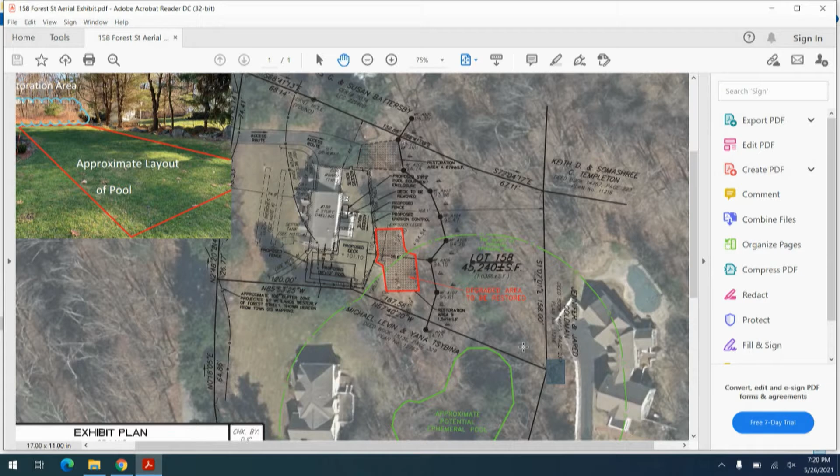I need a motion — motion on the waiver, or motion to close? Motion on the waiver should come first. I move that we deny the waiver request for 158 Forest Street, 242-1800. Second. All those in favor say aye. Aye. Opposed? That's unanimous.

Then we need a motion to deny, basically because we have no waiver, on 242-1800. The motion's got to move to close and issue in 21 days, I think, right? Yeah, that's the correct motion. So moved. Second. All those in favor say aye. Aye. Opposed? That's unanimous. Thank you.

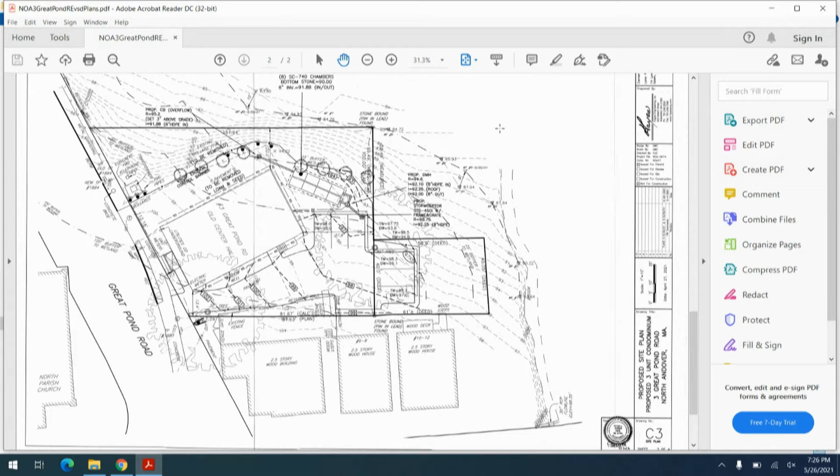It's pretty common to put an infiltration bank beneath a parking area. Yeah, I have it at my place. It's not like we're asking something unusual, and they have to excavate it anyway. So that was my only issue. But Sean, I'm sorry. No problem.

So there are 6 parking spaces that go within the 50? Well, there's 6 parking spaces, corners of which are in the 50. Can you point them out? I'm just going to blow it up a little bit. Sure, all right, so here's the 50-foot line along here, and here's the corner of the parking. And then here's the stormwater chamber, here's the 25, and there's the 50. Gotcha.

Is there an issue with the brook that needs to be evaluated or has been evaluated? We just wanted to make sure whether it was perennial or intermittent, and stream stats show that it's intermittent. So we wanted to make sure we weren't in riverfront.

I don't have any other questions at this point. Thanks. Okay. Right now? Ready?

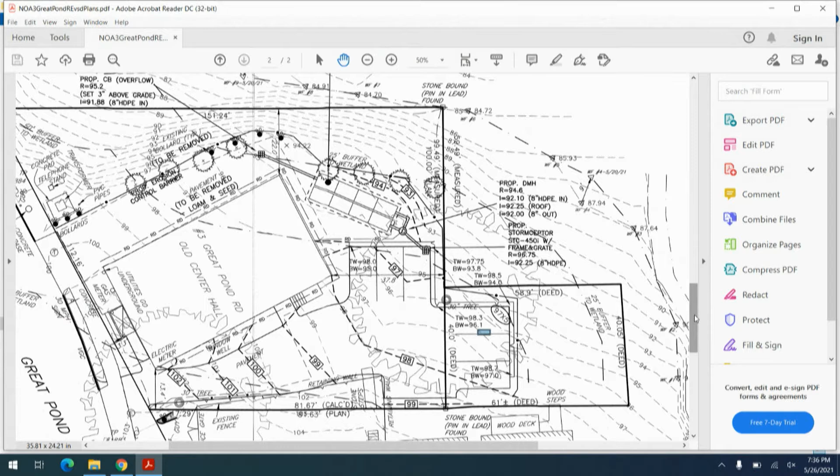I do have an additional question. It's not so much for Libby, but to bring back to the engineers: on the infiltrating system as it's currently proposed, there is a catch basin overflow, basically a relief drain, that when the infiltrator can't take the capacity to meet the runoff, it does result in a point source discharge coming out of that overflow. Test pits are going to help determine to what degree that's necessary and what the impacts might be, but I think we'd be concerned about creation of a point source discharge within the 50.

Did you catch that, Libby? I did. Okay, all right. So there's enough information to go forward for the next time, right?

Yeah. I want to go through comments from the abutter at 10 Johnson Street, Michael and Louise Donovan. I shared that with you guys, but let me go through their questions. It's kind of long, so I'll just go over their concerns on the proposed project, which are as follows.

The 4-inch retaining wall, is this going to be above grade on the south and east of the proposed plan? Will we be looking at a cement wall? Are all of the trees behind 6 and 8 Johnson and/or Hale Scales building being removed? There's a large maple tree in the middle of the proposed parking lot. Is that coming down? The large tree should come down. It is severely stressed, has been dropping large limbs for several years, and the top sections of the tree look infested with something. The tree cover possibly gone to the west and south of the proposed plan. What is the plan for mitigating the increased generation of heat in the summer from the asphalt?

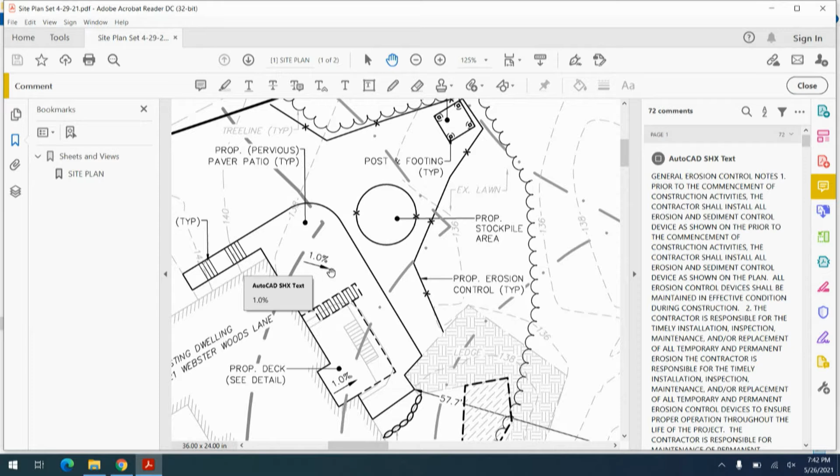I had recommended that perhaps they could operate within the existing footprints of deck and patio and move north out of the 75 with expansion. But this is the plan that they wanted to put forward, so.

That's all I have, due to time constraints. Yep, this applicant is looking for 3 waivers.

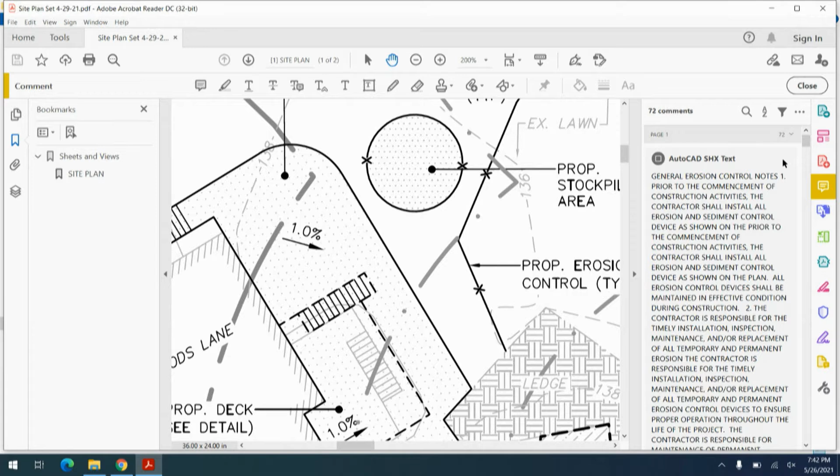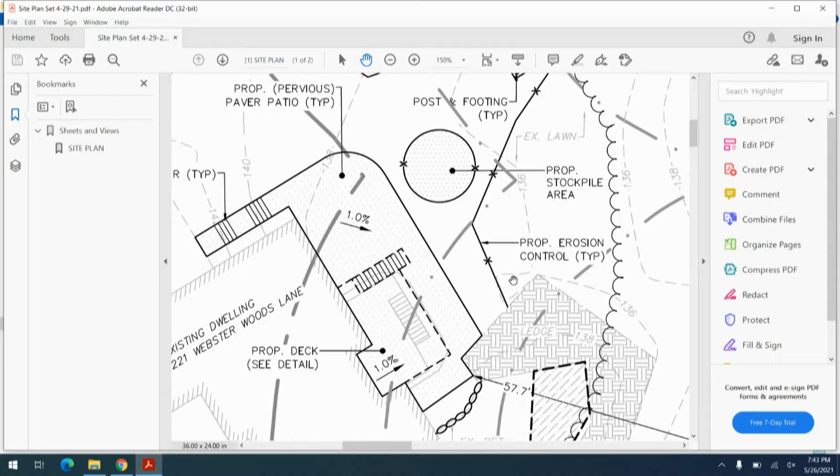That does, but regardless, the alternatives analysis based on the fact that it's on lawn still doesn't deny the fact that it's gonna require waivers because it's in the ephemeral pool. So I think we should talk about the waivers first before we address what they're asking for, or do we go with it as the applicant and go accordingly with the waivers?

I just think things have changed out there since the property was improved with the deck. Whether they need a new deck or not, they want a new deck, that's fine, but I think you've gotta stay in the same footprint you're currently in without expanding beyond it. So that's my perspective.

I have exactly the same opinion, that anybody's entitled to bring a project through regardless of whether the deck's in bad shape or not. But given the fact that the deck is there, I can't allow them to get any closer than the limits of what is already there on that side. Everything else outside of the 75 is fair game, but I think architecturally, they need to put that into their plan.

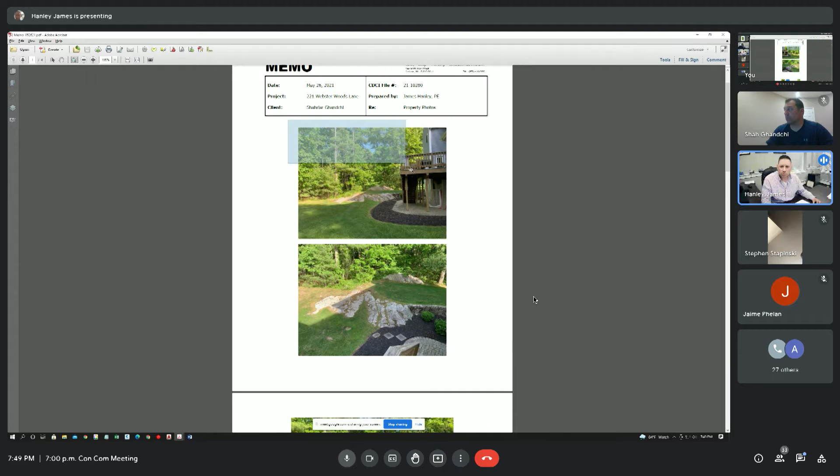We have a net increase of about 274 square feet out of 41,203 square feet of area inside of that 75 foot. So we're actually only increasing this by less than 1%, it's actually 0.66% of the area available in that 75 we're impacting.

All of it, again, is within maintained lawn, and I know they talked about that earlier today. There's absolutely no tree clearing, or cutting, or stumping.

This is, to me, an important piece here, that we do have some topographic considerations that I think are important to appreciate. We have ledge outcroppings, we have an existing landscape wall.

The actual vernal pool is in the background. You can see there's actually a 2 to 3 foot ledge outcropping and landscape wall in between where we're proposing to do any work and where that pool is.

The existing patio, if we look at this, you can see this is 65 feet from the existing vernal pool. What we're proposing to do is just utilize the natural area that's already disturbed on the low side of the ledge here and creep it out a few feet. We're going to have a 58-foot separation.

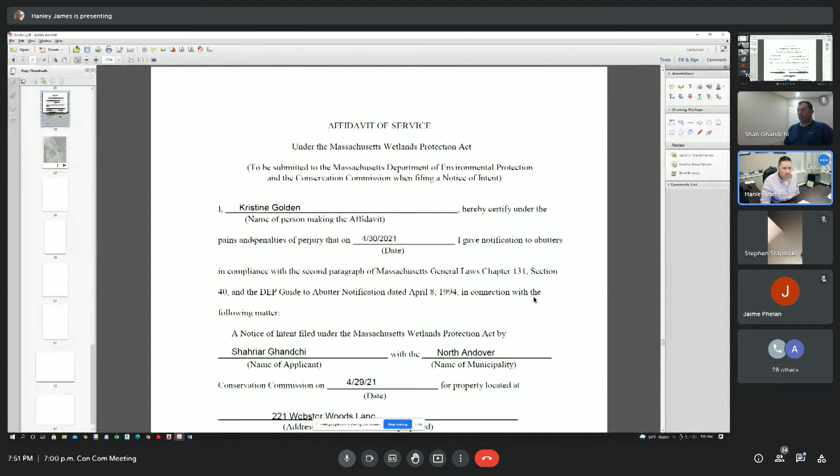We're just going to beef up this vegetation to provide an additional buffer. Amy was very clear that this was an ask, and we understand that, but I'd ask that you appreciate the homeowner's position - they have an existing deck that has outlived its useful life, and they'd like to expand this deck marginally, literally 200 square feet, give or take, not much closer to that vernal pool.

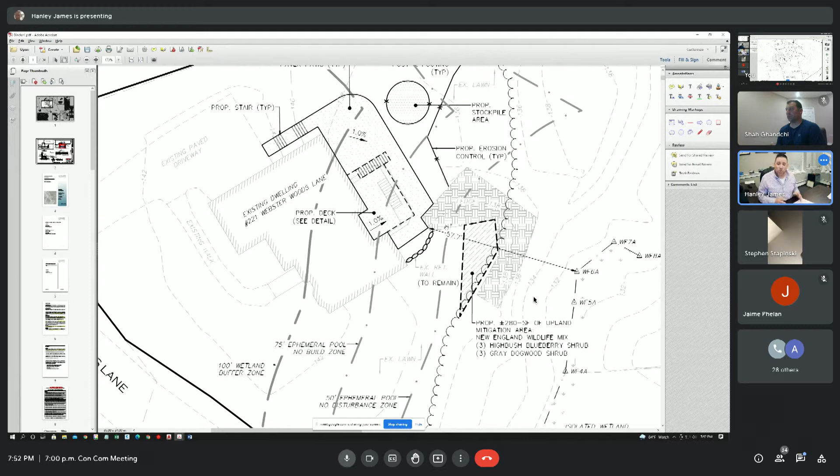I know we're asking for this, but I think because of that topography, it plays a little bit different than the original case that was in front of us. At the end of the day, our proposed patio really won't exceed the existing lawn. It's going to be on the limits of the mulch and carry out toward the driveway up top, within the 75.

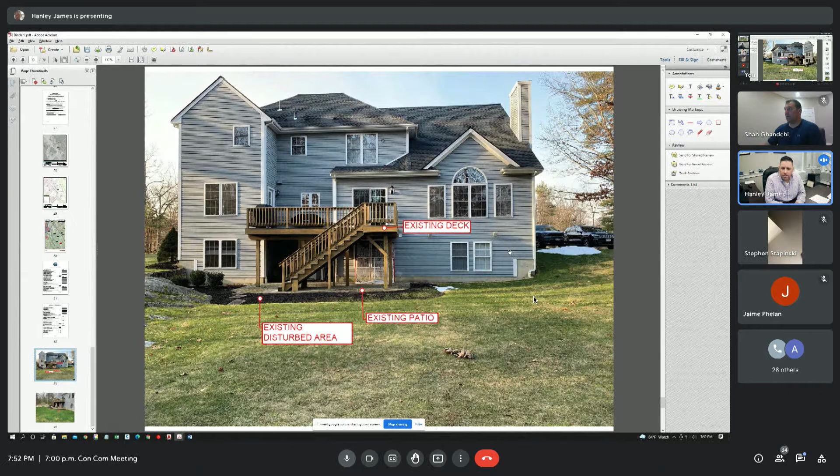So that's all I got. I just wanted to put it out there. I know the client was itching, getting ready to go, and this caught him by surprise last minute. We're just trying to balance your interests as well as the client's interest. If you have any questions, I'll try to answer them. Thank you.

So do you need a motion? Are we moving to close? Are we moving on waivers? I think we can continue. I think they heard what we need. I'm going to ask them to go back and look at this again.

The photographs are helpful with the ledge discussion, but I still don't think that answers all of the concerns with regards to the waivers. I think some better evaluation of the deck and its structure, and whether it could be cantilevered to keep the foundations and posts within compliance, might be possible - might be, I don't know if it is, it's a bit of a reach. I think tweaking that corner of the patio is something that can be done and ought to be looked at, and prior to closing or denying, they should have that opportunity to do that.

I agree, they should go back to the drawing board. So it sounds like what you're asking for is an enhanced alternatives analysis that builds in some of these features just discussed into alternatives that are more friendly to our bylaw.

Yeah, okay, I'm not saying that - that's fair, I'm not saying that, just for the record. What I'm saying is go back to the drawing board and come back with a compliant application. Make it comply and come back. I'm not saying what you did, so we're disparate a little bit, but in any event, I'm giving them the opportunity to go back and redesign it, because I personally won't vote for it as proposed.

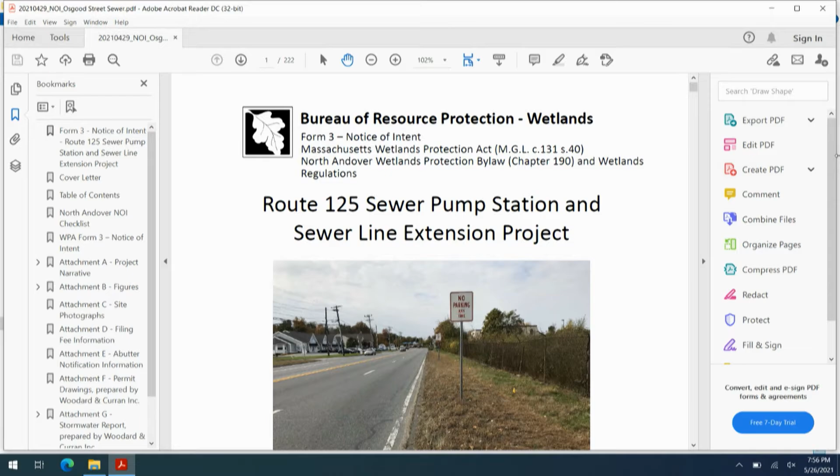This notice of intent is for a new sewer pump station at the northern tip of 1600 Osgood Street on a 0.2 acre easement in a grassy area. The pump station will consist of a wet well with submersible pumps, valve vault, electrical distribution and control pad, meter vault, standby generator, asphalt driveway for access and parking, and stormwater management BMPs that include catch basins, water quality unit, subsurface infiltration chambers, and a surface infiltration basin with stone level spreader. All work, aside from minor grading, is outside of the 50-foot no build zone to BVW Series 13. The stormwater report was included, and calcs show 80% TSS removal and compliance with current standards.

A 2.7 mile stretch of Osgood Street from Bradford Street to Sutton Street, just west of Old Clark Road, will receive a new sewer line. Between Bradford and just north of 1210 Osgood will receive a gravity main to flow to the proposed pump station, and that same stretch will receive a force main.

Sections of the force main that fall outside the commission's jurisdiction have already been installed, roughly between south of 1210 Osgood to south to the mouth of Commerce Way. From Commerce Way to Sutton Street east of Old Clark Road will receive the remaining stretch of force main.

Gravity and force mains will be installed entirely within the paved roadway portions, of which are within the 100-foot, 50-foot, and in some cases the 25-foot adjacent to the wetlands, to the roadway. But again, all pipes are in pavement. A waiver request has been submitted for that work.

I confirmed with the applicant's consultant that the proposed stormwater management system for the pump station is entirely separate from anything on the Amazon site, on 1600 Osgood, on Ozzy Properties or Amazon. So this is totally separate. The responsible party is North Andover DPW for its maintenance.

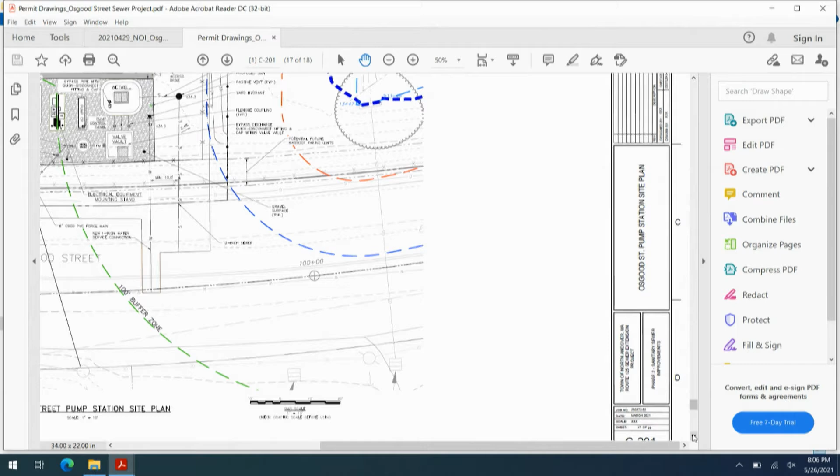So it looks like they're just sheet flowing everything to an infiltration basin. Is there stormwater analysis, drainage calcs that support this stormwater management system? Did you hear that question? Yes, there's a stormwater report included. And I guess one of my questions to the commission was whether you wanted to third-party peer review that. I didn't know if this rose to the level of a third-party peer review for stormwater.

Exactly the same thing—as far as I'm concerned, it's the town. But unless we feel that it's high impact, I don't think we should make the town go out for a third party. If it helps, and if we have questions, then okay. But they have the calculations here, I believe.

I've got somebody reviewing it—well, I hate to say it, there's a lot of information. Let me dive into the site plan itself and comment at the next meeting, and in the meantime take it under advisement. I don't think it needs to go for third party today, but maybe it does before we close.

All right, Al, do you have any questions? No, I just referenced that the applicant provided Attachment A, the project narrative, on pages 1, 2, and 3—it's pretty clear, so I have no questions at this time.

Jack? Just to clarify, the only waivers are for the pipes in pavement, and it's an exempt activity. Okay, no more questions. So we need a motion to continue.

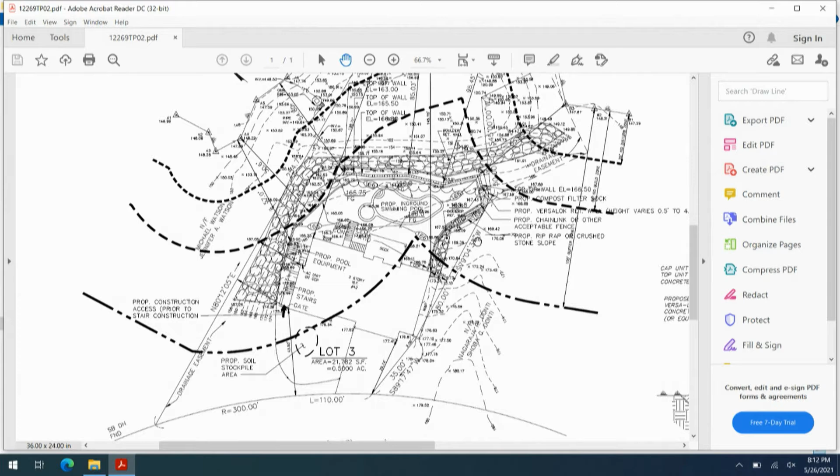The plan I have is very difficult to scale. Do we have this electronically so I can look at it reasonably with my 63-year-old eyes? Because I can't see it. What I'm looking at specifically is, I'm hearing words like retaining wall, first of all, between 0.5 and 4 feet. And what I'm looking at is that's to the bottom of the wall itself, and then beyond that there's still a boulder slope. Is that so? So, I'm blowing it up here. Following my cursor, this is the proposed Versalok wall.

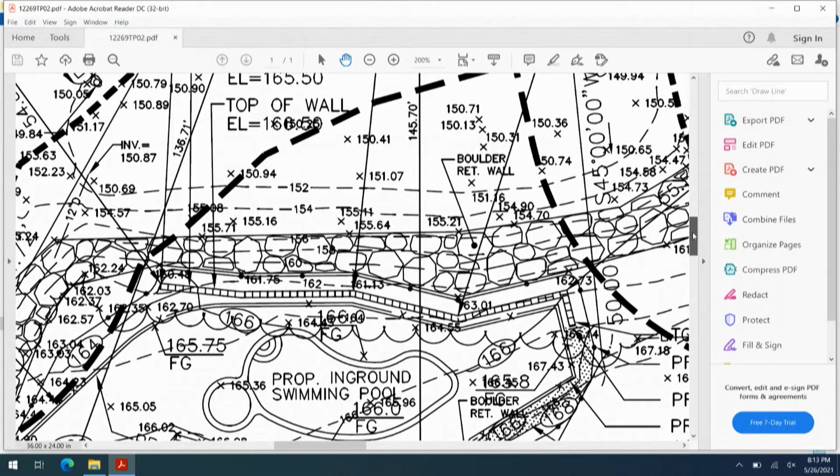And then this is the existing boulder wall that goes already there. It's already there. Okay, I thought that was being proposed in addition. No, no, no. Okay. So, and I think from what I've seen, it's more aesthetics than structural.

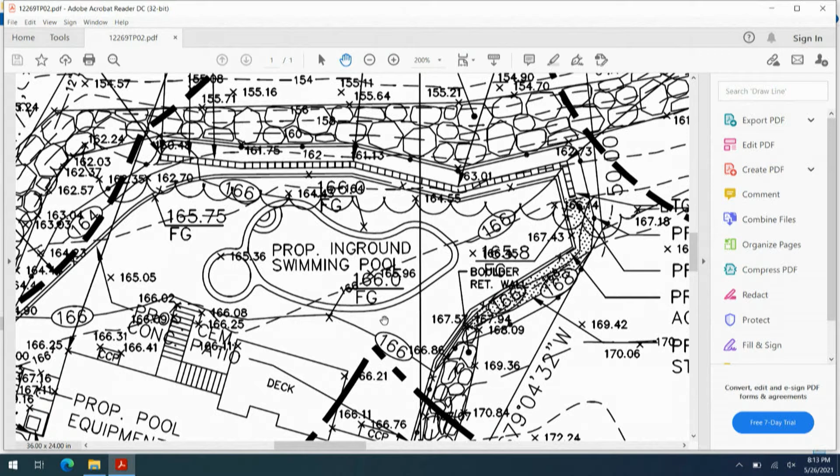So we do have representatives, but if you guys have questions. I'm all set for now. Sean? I'm gonna use that. Oh yeah, we had no questions.

I brought up the construction access, because they were gonna put it on that side, and it was like to get 12 feet it was like a 6-foot incline. No way we're gonna get anything in there. So then they wanna go this way, well they gotta get permission, because they're gonna be actually on the people's property. So it was originally gonna be here, but this is really tight. So instead it will be here. This is the property line.

This is a PRD, so we have reduced setbacks from zoning. And so we have written permission to access this way over neighbor's property. I just want to be clear on that. Anything that's before us with regards to conservation matters, we don't grant or extend or offer any other legal rights other than what already exists, other than the NOI and the order conditions. So if this relationship deteriorates and the access suddenly goes away, we have not granted rights to that neighbor's land regardless of the letter.

Right. If they can't get access in the future and they have an NOI that allows them to do the work, all bets are off, they gotta work that out. Okay, so it's good to have the letter, but that's only just for the record. We're not granting any permission. Right, yeah.

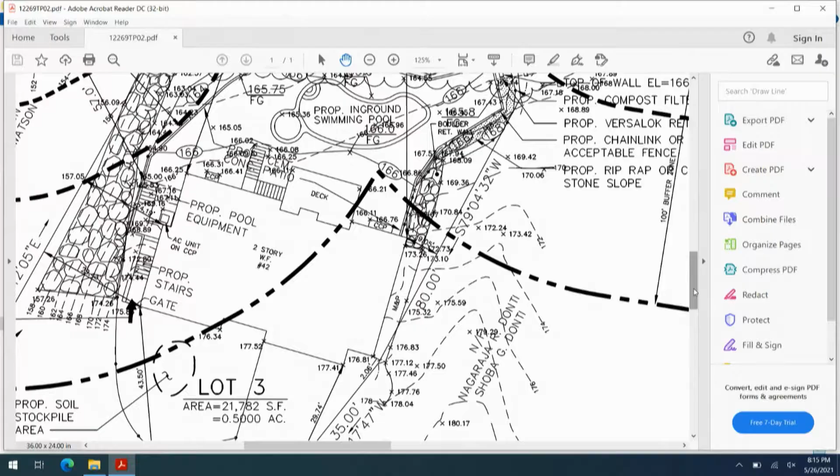Jack, looks like the pool equipment is about 57 feet from the wetland line. Yeah, pool equipment.

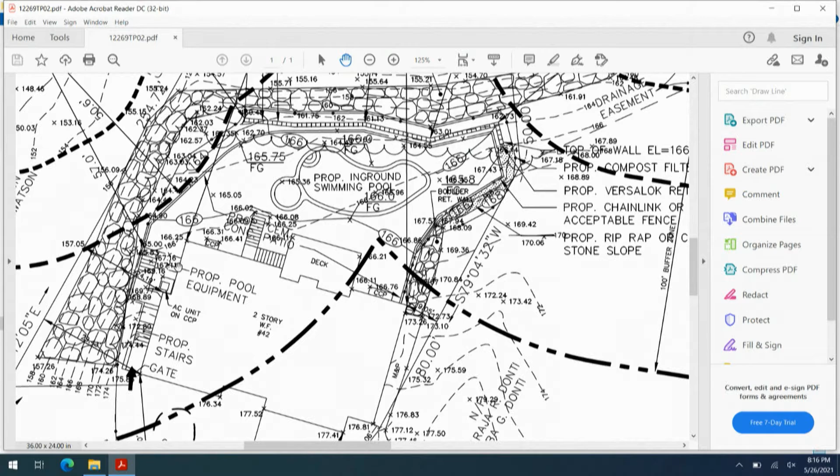We typically require a non-discharge, non-backwash type filter, especially cartridge style. I thought we had that written in the order.

I think so too, I think that's boilerplate. Yeah, that's part of the boilerplate. Pretty sure that'll be a condition.

No other questions? All right, so we need a motion. I don't know if our representative wanted to say anything. Well, they might not have to.

Are you satisfied? I don't have any more follow-up on the blown-up picture. If we're not requiring any new information, I would say we're ready to close. Yeah, Steve, I think we're good with the plan. Steve knows better than to ask any questions right now.

I'm just gonna take the access arrow off the plan and resend it tomorrow. Okay, so we need a motion. Move that we close and issue in 21 days. Second.

This doesn't have any numbers on it on the agenda that I'm looking at. Yeah, that was it, 242-1812, is that right? Oh yeah, okay, 242-1812, move to close, issue in 21 days.

I'll second. All in favor, say aye. Aye. Opposed, none, that's unanimous. Thank you, great, thanks Steve.

Next one's continued, Mr. Johnson. Next one is 242-1810, requested continue to June 9th. So moved. Second? All those in favor, say aye. Aye. Opposed, and that's unanimous.

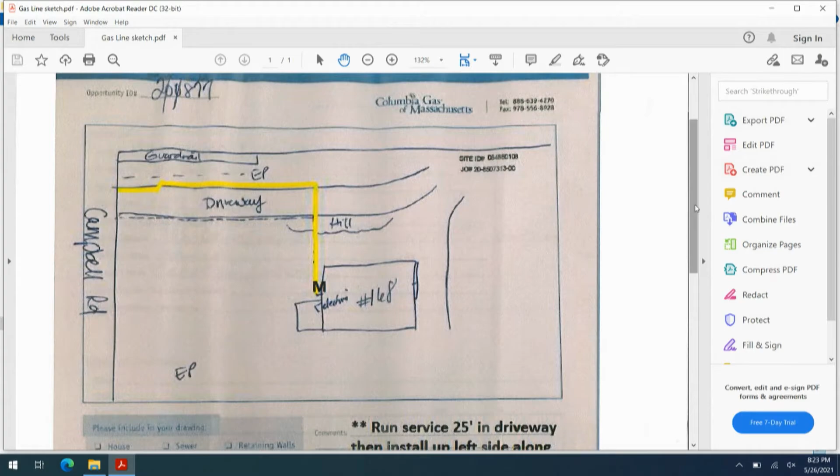So the trench is going to be on the same side of the paved road as the wetland for a stretch? Let me just pull this up again. So there's a wetland here on this side, on the easterly side, and a little wetland on the westerly side.

So the easterly side has the major wetland, and the westerly side has a much smaller B-series wetland. So they are on the westerly side, the B-series side, with the trench, which I think there's probably more wiggle room.

Well, actually, I suppose, well, you're going to be in the no disturb zone no matter what, but I don't know, I suppose you could. That's a paved driveway or gravel? It's paved.

Can they get it further away from that B-series by putting it on the other side of the pavement? That's true. Is it unreasonable to say put it under the pavement? I don't know. It's a temporary disturbance anyways, right? At least the above-ground disturbance is temporary. They're just digging a ditch, putting in the line, and putting it back to its prior state, right?

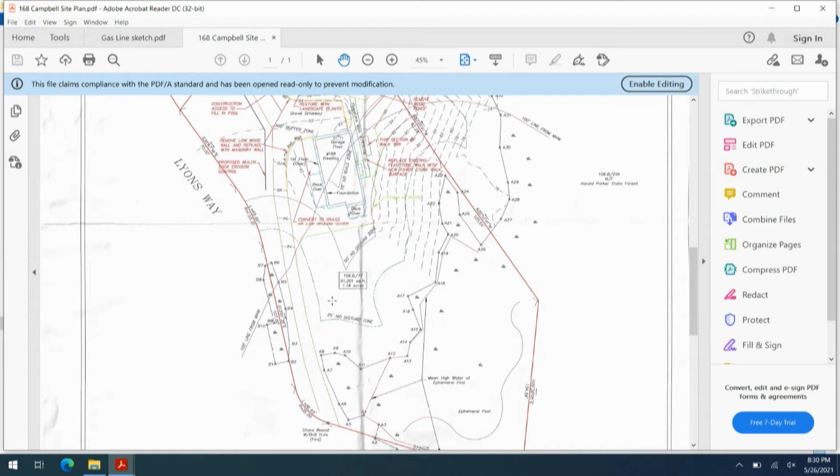Okay, got it. We just have topo that drops off, but based on his site observation—okay, well, whatever, got it, I don't have to repeat it. I didn't understand a word he said. What did he say? No, I'm just kidding. Oh God, come on. No, I'm good, I don't have any more questions.

Okay, Jack? Looks like temporary disturbance to me. I have no other questions.

All right, so we need a motion for the waiver. I'll respectfully move the recommendation as printed in its entirety, with the waiver. Does that include the waiver vote? That was my intention. All those in favor? Aye. Opposed? That's unanimous. I'm going to assume Jack seconded. I seconded, yeah.

All right, Alex, we're all set. So I'm good? Yep, we'll get your permit out probably early next week. Okay, sounds good, thank you. So we move to issue a -3, is that what— yeah, it would be a -3 with conditions and a waiver. Got it. Okay, next one is 895 Forest Street.

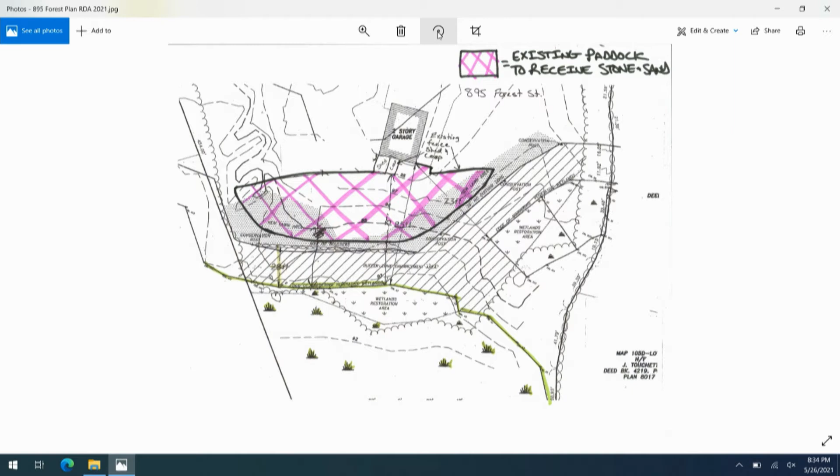The property was before the commission in 2016 for approval of installation of 2 sheds, a chicken coop, and a fence, all located in these areas. The purple hatch is an existing paddock that's basically dirt and gets pretty muddy, so they're looking to take out some of that dirt, bring in sand and stone, and have a more stable situation.

I recommend closing the hearing and issuing a negative 3 with conditions as I discussed in my recommendations. No questions? I have no questions and no problems with the application. Not a one. Okay, motion.

Move negative 3 with conditions as recommended. Second. All those in favor say aye. Aye. Opposed? That's unanimous. Thank you.

Next one. 415 Chestnut Street.

This is an RDA for the demolition of a rear deck and construction of a larger deck off the rear of the house. The other part of the project involves a proposed deck at the front of the house to connect both front doors, 7 by 34.

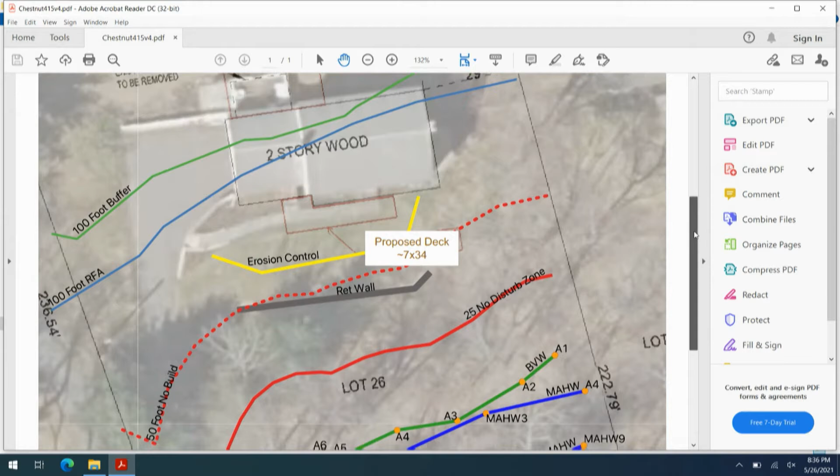Rimmer Environmental delineated the wetland. This is Mosquito Brook out front, and this is the road. We have Mosquito Brook with a fringe BVW on either side.

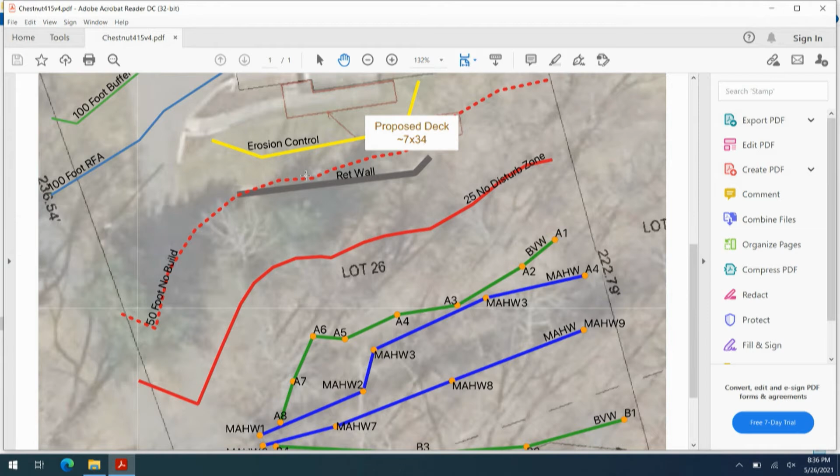We have an existing retaining wall right here, so nothing's going to be closer than that, which follows partly the 50-foot no-build. The front deck is 66 feet to the edge of BVW at its closest point.

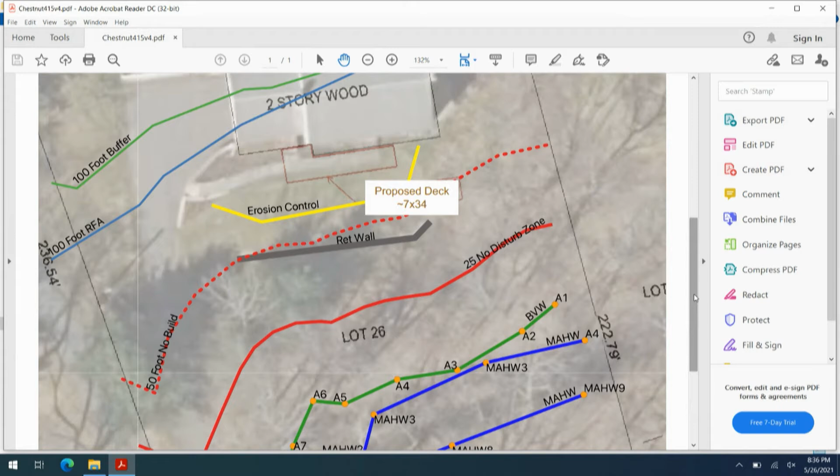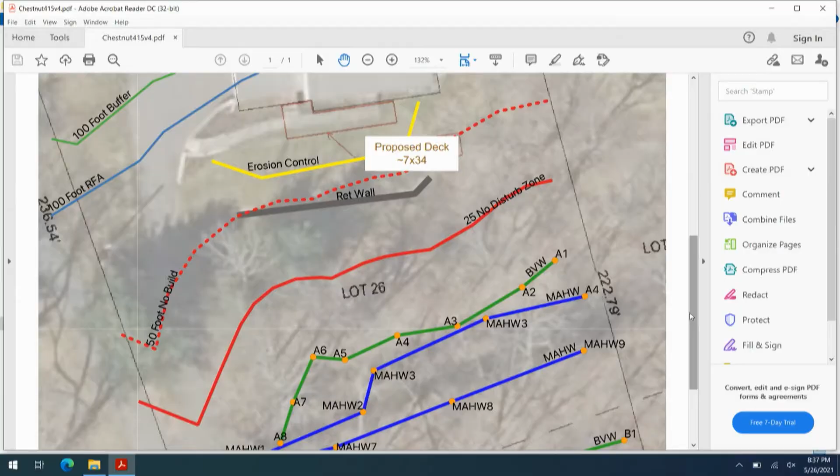No questions? I have no questions. None. Motion: I recommend closing the hearing and issuing a negative number 3 and number 2 with conditions as recommended. So moved. Second. All those in favor say aye. Aye. Opposed? That's unanimous. So you're all set.

We're good, Mary. Okay, thanks. All right, next one.

1520 4th Street extension. All righty, let me get this up. All right.

This is an after-the-fact RDA for demolition of an existing deck and construction of a patio in its place, that is 95 feet from the BVW at its closest point, and a chicken coop that was installed 60 feet from the bordering vegetated wetland.

We actually found these to be unpermitted based on our site visits for a tree removal request. So we asked him to stop all work and submit an after-the-fact RDA for these work elements, as they wouldn't require a waiver and is perfectly approvable.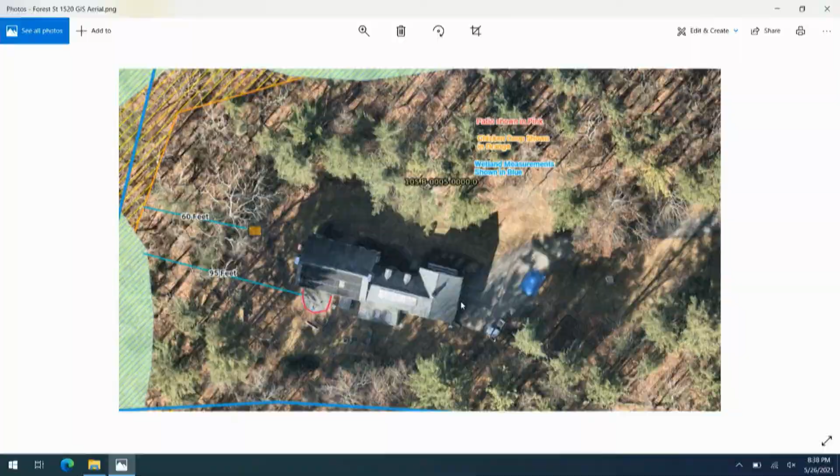We're proposing erosion controls between the patio work—has he already done that? Yeah, the homeowner has already installed erosion controls per our enforcement letter, and he's stopped work waiting for approval for this. Good. Yep.

That's really a synopsis of what's going on here. So I recommend closing the hearing and issuing a negative 3, just maintaining erosion controls and a post-construction inspection with the Conservation Department to verify compliance.

Thank you. Sean, no questions? Al, question? Jack's got a question. The project, I have a question.

The project is listed as 1520 Forest Street Extension. Yes. The WPA Form 1, request for determination of applicability, is listed as 1520 Stonecleave Road in Boxford. No, I know—what do we have here? No, the mailing address is Stonecleave.

Because of in Boxford, right? That's correct, so it's the same thing as 1470 Forest Street Extension. You have to go into Boxford to get back into North Andover. So that's the legal address? Yes, but it's physically located in North Andover? North Andover, okay. I'm satisfied, just wanted to make sure we had it right. Somebody's going to be looking for a mortgage discharge at some point in the future, and if the address is wrong... Gotcha, okay, thank you.

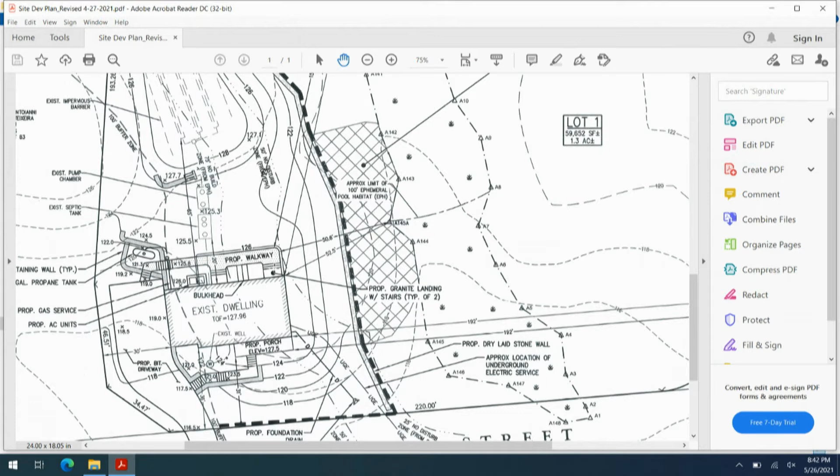At the last meeting, there was a patio at the back here, and there was discussion about not coming closer than the existing dwelling that has been built. So what they did was shrink down - there was a patio and decks, I'm sorry - what they did is shrink down the egress areas to granite landings and stairs with a walkway instead of a patio. Granite landing and stairs, and the bulkhead is here, and then a walkway out to the driveway.

There was a gas line that was proposed around this corner, but they were able to move it and stayed out of the 50-foot. The front porch remains the same as proposed previously, and I had provided the commission pictures of the house built, the shell right now. We have a front door that's roughly in the middle right here. So the discussion was that the front porch could be shrunk and removed from the 75.

I did communicate that to the applicant and the project engineer. They came back with an alternatives analysis that starts in the beginning with the pre-existing house that was demolished. So they start with calculations of how much of that pre-existing house was in the no-disturb zone to the vernal pool and no-build zone. I can go through the square footages if you want, but that's the crux of their analysis - that in the end, they have 40 square feet less encroachment than what the original demolished house covered in the ephemeral pool zones.

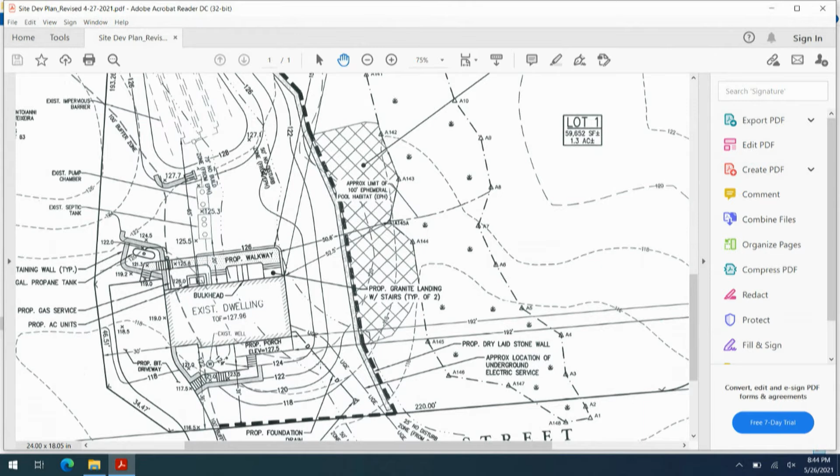And I know we have applicant representatives with us this evening, so I don't think you really want me to start rattling off square footages here, but I wrote them down for you. So we worked in the front of the house, and they were adamant about the front porch, even though there was clearly an alternative to the front porch. So on that note, I'll leave it up to Sean.

So what was the term you were using a second ago? Not the original approved dwelling - you said the house that was there. So the order of conditions governed the demolition of an existing house that was partially within the 50-foot no-disturb zone to the vernal pool and 75-foot no-build zone to the vernal pool. And so the order allowed for its demolition and a new house footprint to be outside of the 50-foot no-disturb, but partially in the 75 no-build.

Because I think we were backing up against... well, I think part of it was, we had a septic system we had to fit on the lot as well. This is not sewered, so.

So we issued an order in 2018 to build this house, and now to try to change it - to raze and rebuild. So then, how did that get us to where we are tonight? So the approved plan had a box for a house, and that's it - no walkways, no decks, no porches, nothing. How big was the box?

Amy, is this an after the fact? No. Okay, can you guys see that? We can see it. Yep. You should blow it up. We blow it up, yeah.

Can you see that? So what we did is we superimposed the approved dwelling footprint from the original order onto the proposed plan, and you can see that the existing structure is further from the wetland and from the ephemeral pool habitat line than the approved structure. You can also see that the whole right side of the structure is further away.

The front porch that we're proposing is about 3 feet in front of the existing building envelope. And again, we calculated the square footage of the structure and the porch within that no-build zone, and it's actually less than what was approved. So we felt that it was viable to ask to allow for the construction of the porch.

The porch could be moved outside that 75-foot zone and still get to the front door, but we felt that as proposed, it was in substantial compliance with the building footprint that was approved.

And with regards to the back doors, when Mr. Hyder built the house, the issue we have is he wasn't aware that there was no walkways or patios approved, so the house that was built has doors on the back, and there's a set of sliders right off the kitchen, off the back rear.

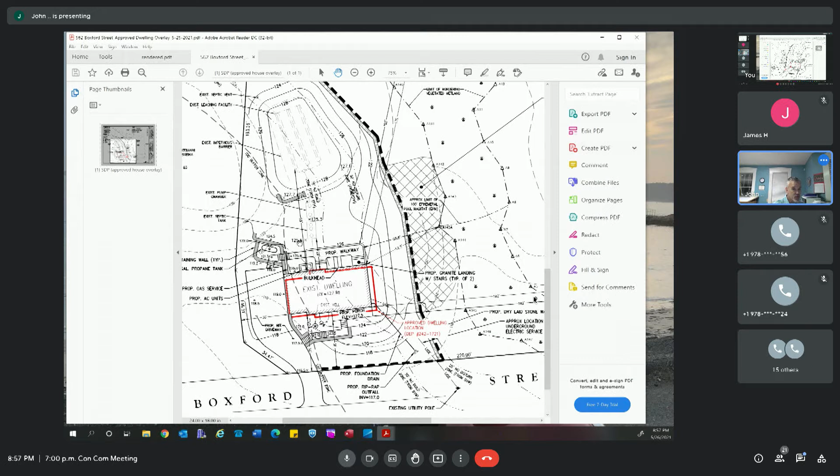I'd be more than happy to answer any questions.

Thank you, John. Sean? I don't have any questions.

I think there was a building there. It is gone, it's kind of a new canvas at that point. There was an NOI that was granted that is the new canvas, and this is an amendment from that. So concerning the calculations that were done, as far as what was being occupied before versus now, I don't find that really all that persuasive in this argument concerning a waiver request at this point in time.

Okay, I'm in agreement with you. That was a first for me.

If we wanted to allow certain things, fine. But for me, to even consider a waiver, it would be moving the porch out of there because it can be done.

Unfortunately, the back half of the house is already built, and there really isn't much they could do there. Well, he did mention he was willing to do stepping stones back there, or even pervious pavers.

So I do agree with you on the front porch, and now, at least where I'm at, is as far as the back. Because there clearly is an alternative to the front porch. The back, if I remember correctly, the slider is in the back, and it would be really difficult to address. So I mean, we did miss the boat on this one.

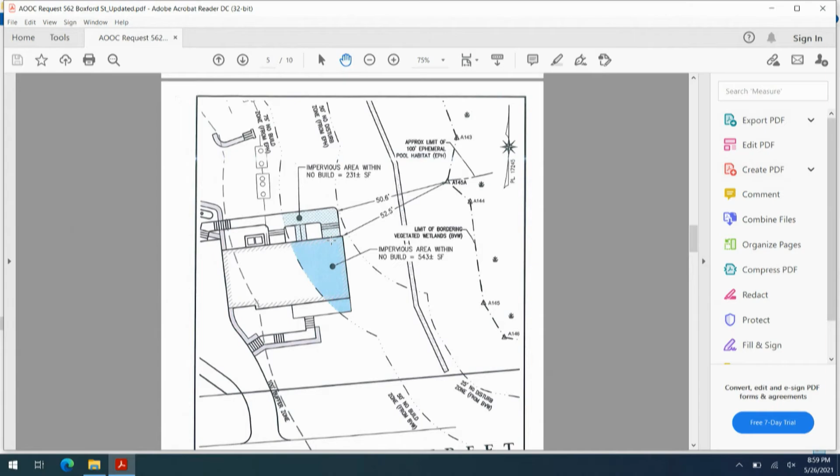Well, there's two possibilities here, as I see it, and it would require somebody doing some homework. When we issued the order of conditions to raze and rebuild, it's possible—I know in the past, I don't know if on this project, but in the past, when we've been confronted with a pre-existing non-compliant structure being replaced by a new non-compliant structure, we have grandfathered certain features of the house for purposes of not having the person lose their buildability.

If the order of conditions, or the deliberations on this order dated May 24th, 2018, indicates that we considered the new structure to be grandfathered, then the problem would be solved. If there's no grandfathering mentioned in the discussion, deliberations, or order, then the new work has to be brought into compliance. It's just not, in my humble opinion, falling into the category of a waiver. So it was either grandfathered or it's not, and if it's not, it's got to meet the setbacks, I think.

It was my recollection of this application—I don't remember any grandfathering of anything. I mean, it's a Hail Mary, but you look it up and see if we did, because I know in the past we've talked about that before. We've had many filings over the years that involved a demolition and replacement, or partial demolition and replacement, that would be non-compliant. The house would have been built 50, 60, 70 years ago, and it didn't comply then, but the rules are different, and I know that's something that's been done. I just don't know if it exists in the order.

It's either that or just make it comply, please. Jack? Yeah, in my opinion it's similar to that. I think we have the house that was approved. John, you laid out a pretty good, effective story on your approach to enhance the site.

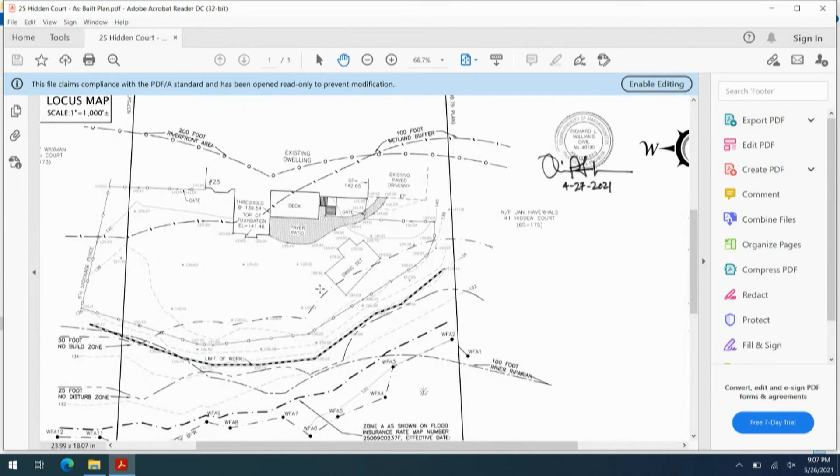Can I have the, can I tell the story? Motion? Mr. Chairman? Sean, so any questions? I think, did I provide photos? I don't think I have it. Let me, you got it, John?

Sean, any questions? No questions. I have a motion if you're ready. Jack, any questions? No questions. All right, issue the certificate of compliance as requested. Second. All those in favor say aye. Opposed? That's unanimous.

Next one is 242-1727, 404 Summer Street. Alrighty, so the order issued in January 2018 governed the razing of an existing dwelling, pool, fencing, and construction of a new single-family house with a garage, patio, deck, subsurface sewage disposal system, and driveway with associated utilities within the 100-foot buffer zone to BVW, but respecting the 25 and the 50.

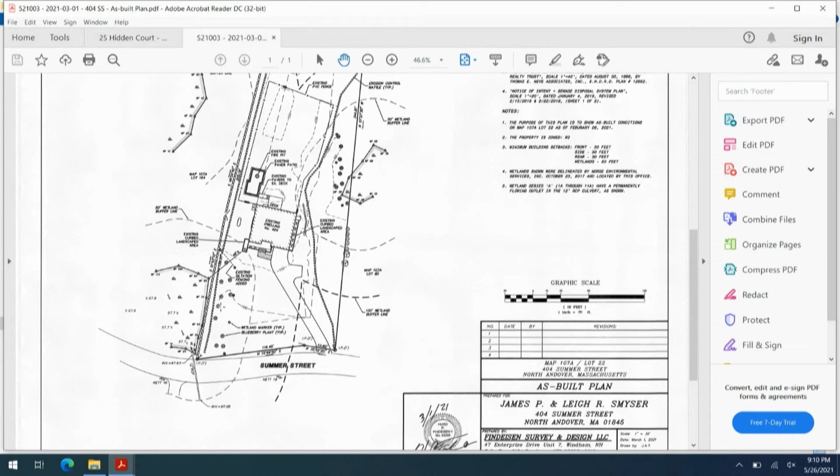Thank you, Amy. Sean, no questions? Hal, no questions. Jack, no questions. Motion to issue the COC for 404 Summer Street. Second. All those in favor say aye. Opposed? That's unanimous.

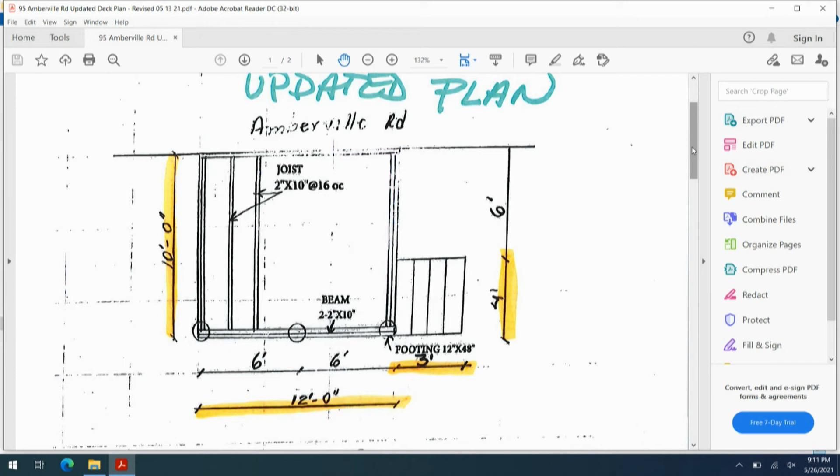Next one is any small project, NACC 272-95 Amberville Road. This is a proposed deck at the back of the house, a 10 by 12 deck with a 3 by 4 stairs off the side of it. It's well under the 300 square foot threshold for the small project permit. It is 74 feet from the BVW at its closest point. It's entirely within lawn, and there will be 3 concrete footings, 12-inch by 48-inch in size.

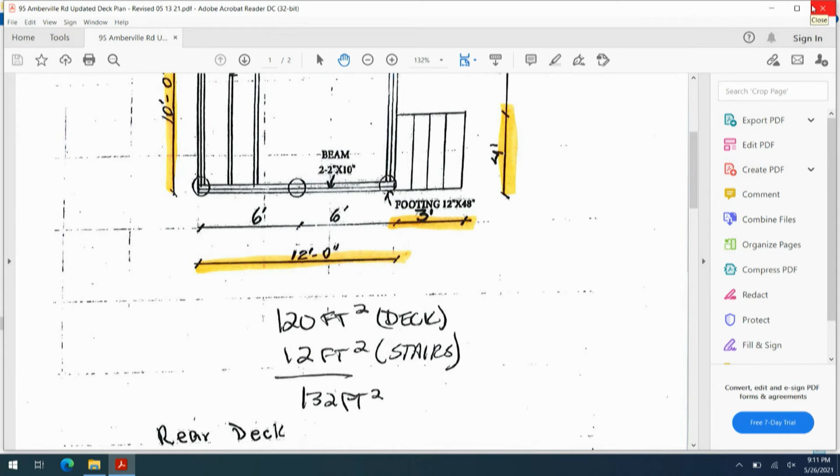There is a topographic rise from the back of the house to the wetland, so we don't have a slope issue at all. It actually slopes towards the house, so there's no risk of sedimentation from any of the work into the wetland.

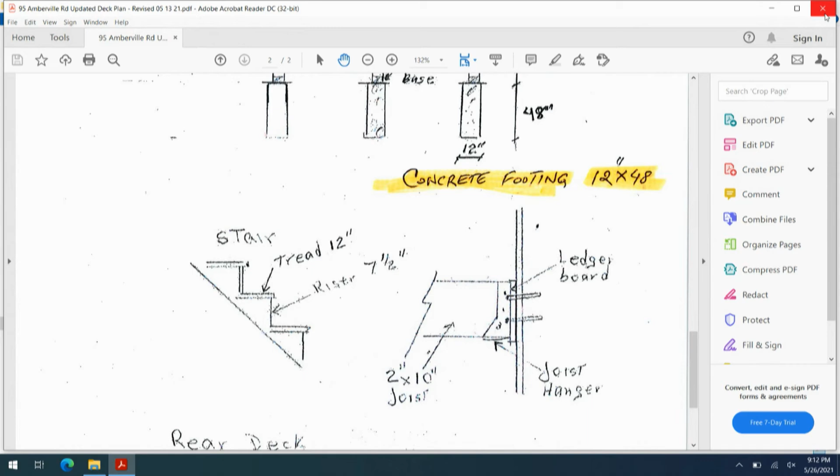So I recommend issuing a small project permit category A with conditions as listed. No questions? No questions, I'm sorry, no questions.

Motion? I move that we accept it as an A and we condition it as recommended by our administrator. Second. All those in favor say aye. Aye. Opposed? That's unanimous.

That's it, right? Wait, there's usually two. Okay, next one is, where am I here? NACC number 273-99 Hay Meadow Road.

So this is an in-kind replacement of existing driveway. It is a full reclaim, because it's in pretty bad shape. Old asphalt, loam and rocks will be excavated out, regrading and compaction with 4-inch gravel base, 2 inches of binder coat, and 1.5 inches of finish coat.

Field inspector visited the site. The closest point of the driveway is 18 feet from the BVW. In consultation with the chairman, he recommended a small project because it was entirely in-kind replacement of an existing drive. There was no expansion. It's in bad shape, it couldn't have been overlaid.

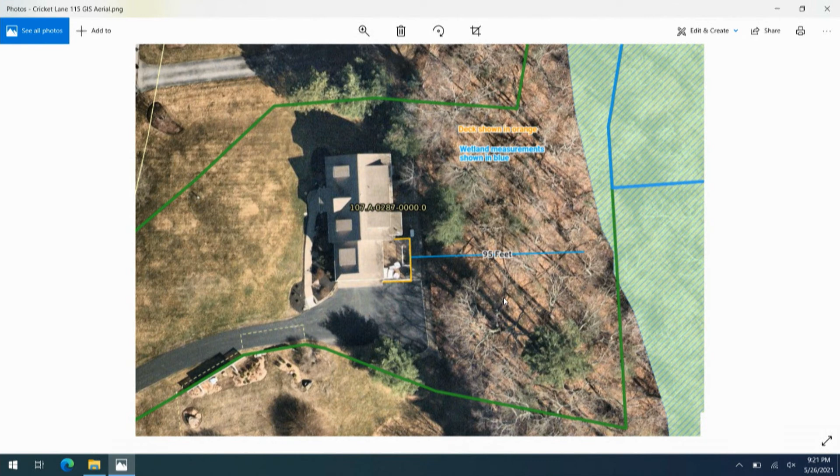We did an on-site visit to get that measurement, and I recommend approving it as a small project category B with a post-construction site visit to ensure compliance. No questions? I have no questions. Good, so moved. Second. All those in favor say aye. Aye. Opposed? None, that's unanimous.

Next one is modifications, 242, 1755, Zero Rea Street, Lot 5 through 7. Didn't we do this last time? No, there's a different one, different lots.

This is to head off the need for an after-the-fact modification for these houses, for decks and stairs. Those things don't come with the envelope. When you get an envelope, you don't get these things.

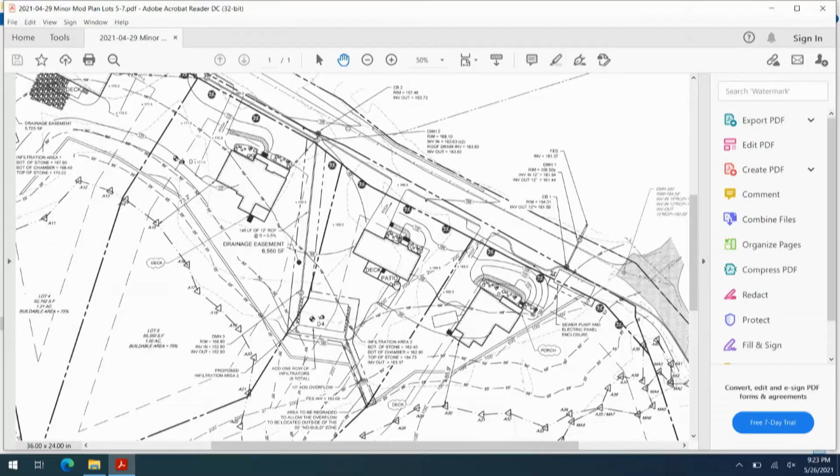So lot number 5 is going to receive a 15 by 12 rear deck with stairs, 74.3 feet from the BVW at its closest point. Lot 6, the stuff they're proposing, the patio, is outside of jurisdiction, but they're showing it on the plan anyway, which is okay. And lot 7 is going to receive a 10 by 9 rear deck with stairs, 65.9 feet from the BVW and 125 feet from mean annual high water line.

So no waivers, just simply let's show on the plan what we're going to do. And I would recommend approving the modifications as presented.

Any discussion? I'd just like to congratulate all the lots on their upcoming additions. I think that's great for each of them. No questions. No questions for me either.

I move that we approve the modification for 242-1755. Second. All those in favor say aye. Aye. Opposed? That's unanimous.

Great, thank you. Next one is 242-1789, 35 Hawthorne Place. Let me just pull it up here.

The order issued in July 2020 governs the installation of an in-ground pool. At that time, no patio was proposed around the pool, simply a coping and lawn. Since then, the applicant decided a patio would be a good idea. That's pretty novel. They just wanted the cement pond. Go back to the tape and see if at the original meeting somebody said, you know, if you're going to put this in, don't come back. Anyway, work is ongoing and in compliance.

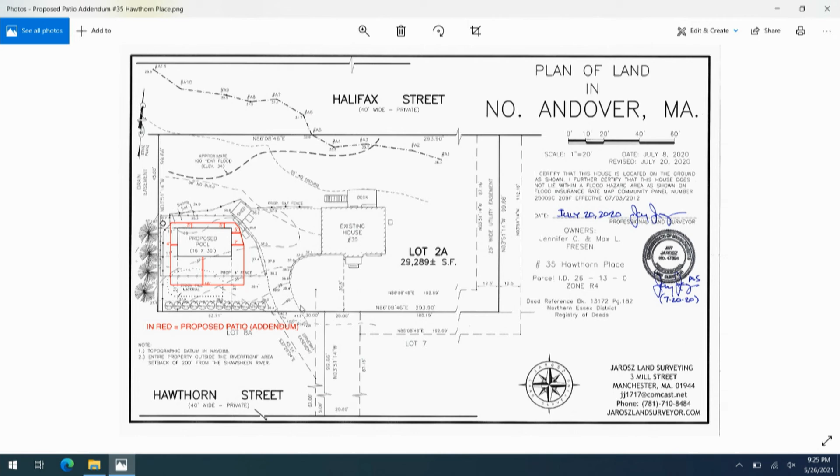I would recommend issuing the modification, but just requiring that the paver patio remain pervious and not grouted.

John, any questions? No questions. Al? No questions. Jack? No issues, no questions. Motion? Do it, Jack. Move that we issue the modification for 242-1789 with the requirement of pervious pavers. Second. All those in favor say aye. Aye. Opposed? That's unanimous.

Just one quick question—I saw the name and it rang a bell. Is that the one we went to last year where they were clearing trees out in the woods? There was a tree within the limit of work that was dying and rotted. Yeah, that's what they had—put a fence around it. They were clear cutting in the woods. No, it fell and then they dragged it out. But then there was brush cutting too, remember? No, I ran out there after you did, and it was the limbs that fell, and it was falling on Japanese knotweed. They dragged it out, and then the knotweed just sprang back. I was just curious trying to remember, because when I looked at where it is, I remembered it. Yeah, it was behind the shed, and it was going to fall on the shed.

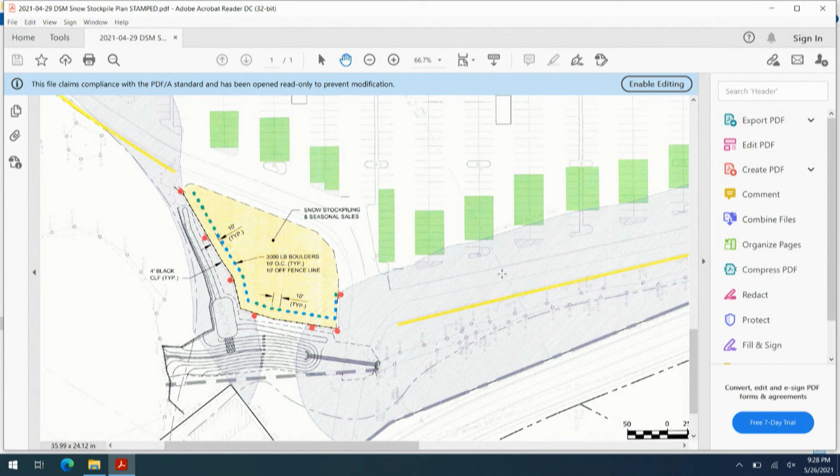Questions? No questions. No questions. No questions. Motion? I move that we approve the modification for 242-1745 as stated. Second. All those in favor say aye. Aye. Opposed? That's unanimous.